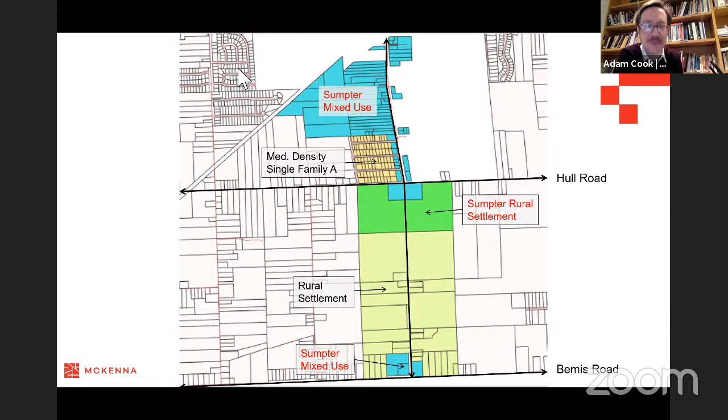So Dan, I think we can probably move on to the regulating plan.

So when we talk about a regulating plan, when we have a number of parcels taken together, we call them a future land use category, Sumpter mixed use. When we get down into the nitty gritty of figuring out what that looks like, we get into the concept of form-based zoning. When you do form-based zoning or form-based coding for an area, a regulating plan works similar to how a zoning map might work, only it's looking at a much more granular, parcel-by-parcel level.

If we go forward one slide, we can look at that proposed regulating plan, and we can see there are several different colors shown. We're zooming in here - we didn't want to show all the way down to those two corners at Bemis, but those corners will also look very similar to this. When we zoom in here, where there's a lot of complexity and existing development along the corridor, we can see these parcels get classified into four distinct categories in this regulating plan.

We start with what are called anchor lots. Those anchor lots are the two areas on the immediate southeast and southwest corners of the Hull Road, Sumpter Road intersection. One small portion of the southwest corner is currently occupied by the Citgo gas station and convenience store. This would apply to that parcel, the area immediately around it, and a mirroring of that area on the other corner.

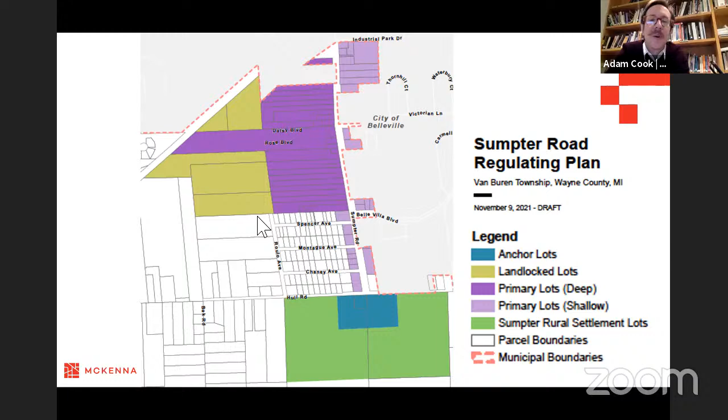It makes sense to mainly go through the building types, and then we'll go back and key them into the various areas illustrated on the regulating plan. It's actually a relatively simple menu of building types, and we'll go through all of them now. There really aren't that many. There are just some slight variations as to which building types are permitted versus accessory versus special uses in the various areas of the regulating plan.

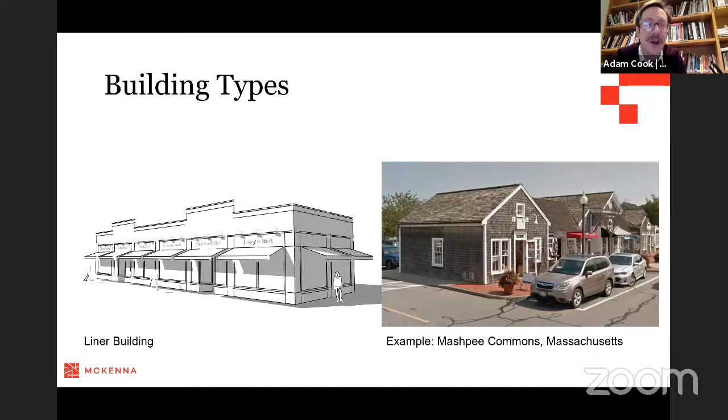Let's go on to the next one. The next one is your mixed use building, and the mixed use building is really one of the basic form-based code 101 buildings.

You see them in a lot of different contexts. You see them in downtown Main Street contexts—if we think about downtown Belleville and some of the new buildings going up and some of the older buildings that exist there, we see a lot of these. But they can also be built in a more rural or semi-rural context, or a village or hamlet context.

Just one example—again another East Coast example—the architectural ornamentation and detailing might look a little different from how it would look in Michigan or the Midwest. But Waterford, Virginia is a rural kind of hamlet-style village on the far outskirts, near Leesburg, if you're familiar with the Washington area—so on the far outskirts of Washington.

It's a village that grew to a point where it could support these mixed use buildings. Even though this is more of a traditional colonial style, it sets a precedent to say this has happened for hundreds of years—we've had these types of buildings, and they are appropriate for the rural or semi-rural environment if done properly. That means paying attention to the overall dimensions, the massing, not going over two stories, and making sure the vernacular architecture is used.

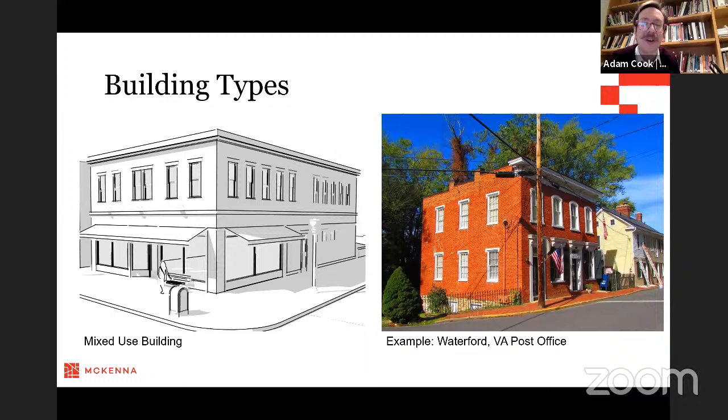Let's go on to the next one, Dan. The next one is the retail building. The retail building is even more basic than the mixed use, because within the confines of that building we're only looking at one use, and that one use is retail.

Again, these buildings you're probably quite familiar with. We see them all over Michigan, in all sorts of contexts. The one I'm showing you on this slide is from Ferndale, and this isn't in downtown Ferndale—it's tucked way back in the middle of a residential neighborhood. These were built frequently, prior to the mid-20th century, as corner stores and neighborhood services, built back in the middle of walkable neighborhoods. These are also appropriate for a semi-rural context, and would look not dissimilar from a nice simple brick building like this one.

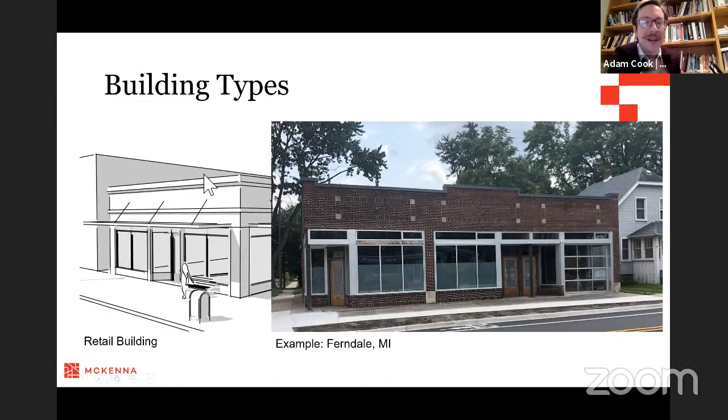Let's go on to the next one. I don't have a built example for this, because it's really an open-ended building type. We call this artisan, studio, craft, and culinary. This is a light industrial building, but when I say light, I mean very light industrial—the type of building that could be an artisan studio or a collection of artisan studios. Think small-scale printmakers, artists, potters, art studios, small metalsmithing studios, small workshops—something where a commercial component is tied to a production component, but that production doesn't create the externalities you'd normally get with a traditional light versus medium versus heavy industrial zoning. We're talking very, very light industrial.

The word culinary is in there—these could be purposed as small-scale production kitchens or community kitchens for people baking commercially but who don't have their own storefront or bakery. So this is very much almost a cottage style of building. You could do small-scale production out of these. I think the key thing to take away from a diagram like this is the scale. We always put a person in these diagrams so we can get a sense of how big a building is relative to the average person. You can see this is very small—that's not a 10 or 12 foot tall individual, it's about somebody of average height. So you're really looking at a one-story building of no more than 10 to 12 feet high, small dimensions, a variety of potential configurations. It's a very flexible building type, really an unassuming, traditional, simple architecture.

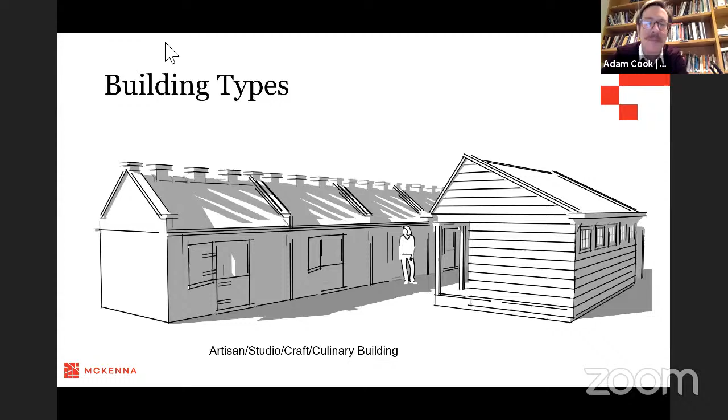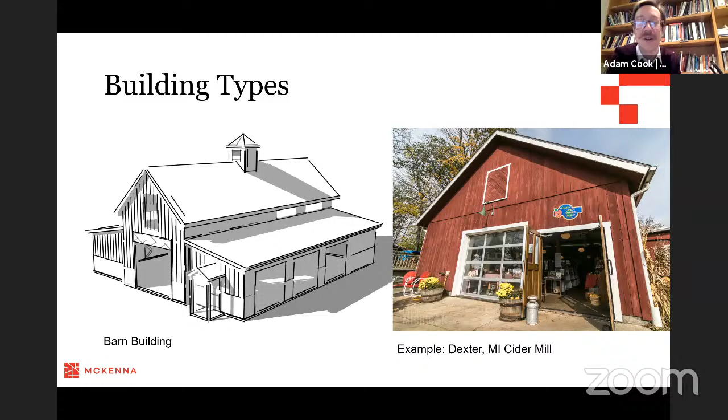When we think of the barn type of building, this is what we're aiming at—something that could actually be used as a commercial venture. There could be a low-externality, small-scale craft or production component taking place, like a cider mill or anything on that level, but there could also be a storefront built into it. It doesn't have to be a smelly or rundown livestock environment. A barn allows for that rustic, rural feel to carry forward, while also providing flexibility for a creative concept like this, or it could simply be used as an accessory building—a traditional storage building with flexibility to grow as properties change hands over the years or as people's lifestyle needs change. Let's move on.

The next one we call a kiln house. Our designer, Mike Campbell, who works on a lot of these things, coined that term for this, and I like it. I Googled the term 'kiln house' and didn't find many references to it, and I think it actually fits the bill quite well.

This is something that you might think of if you were doing pottery. This is the type of small house style building that you might use to have a kiln and fire the pottery. But we're not necessarily assuming that would be the only potential use, because that's a very specialized use.

If we want to take this into a real world example, you can see there on the right, I'm showing some artists' cottages. This is in a little development down in central Georgia called the Cottages at Serenbe, or Serenby, I'm not sure how it's pronounced, but Palmetto, Georgia, and you can Google this and see other pictures.

Dan recently visited Sedona, Arizona, or maybe not so recently, but I know Dan was talking about the artist cottages down there. I thought about showing those, but when we're talking about Southwest, we're in a totally different architectural environment. But from the standpoint of the light building footprint and the types of uses that these are appropriate for...

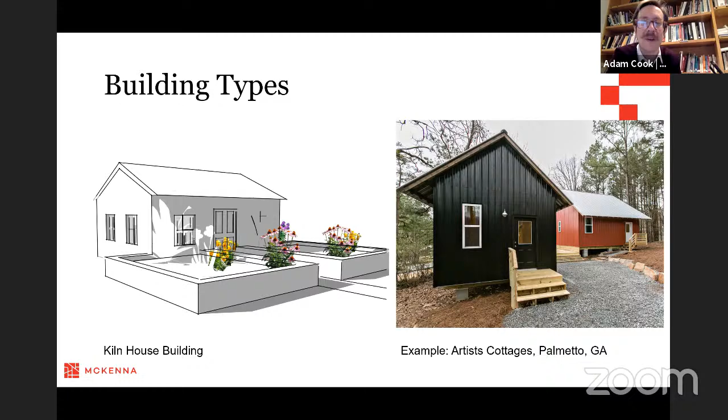This is kind of the vision behind the Kiln House building. Again, you can see in this Georgia example, this is very much a cultivated kind of semi-rural environment where these cottages are nestled deep in the trees. You have gravel pathways, even though they're accessible and have modern fittings on them. You really marry the urban commercial aspects with a very rural rustic environment there.

Next building type, makerspace building. I think I've shown this Ann Arbor T-shirt example in a few presentations to the Van Buren Township, as well as some other communities I work with, because I like it so much.

It's really a good example of what a building type would look like that had a retail shopfront component, something open to the public on a regular basis, but also had an adjacent space that could be used for small scale storage and production. From time to time, some of those spaces require direct vehicular access to the building. So this is one idea of how that might look.

So we can see with the Ann Arbor T-shirt company, they do have their T-shirts there on prominent display in their windows in that retail shopfront component. You can go in there during business hours and shop and look around and buy T-shirts. And then immediately adjacent, they have that storage component to the building, which in this case has a garage door access, but they've cleaned it up very nicely.

It doesn't look like your traditional industrial building because they've done a nice stucco treatment on their exterior wall. They've done a mural, and they've done some really nice signage.

This is the type of building that used to really populate areas on the kind of urban rural fringe before we started hyper kind of zoning things into industrial parks and putting those buildings far back in little pods. Back when buildings lined the roads, you would see buildings that had a combination of shop front and garage doors and vehicular access.

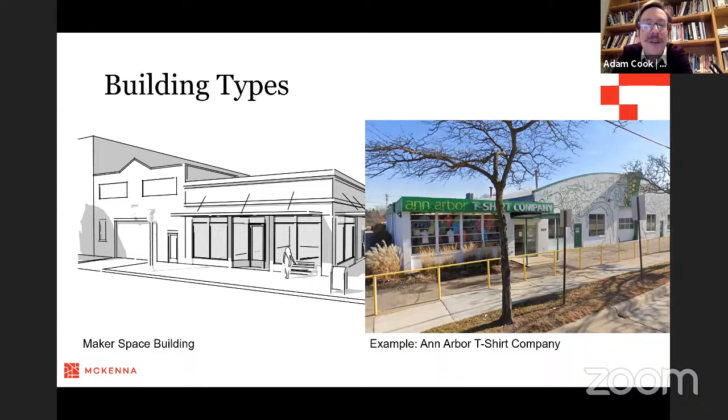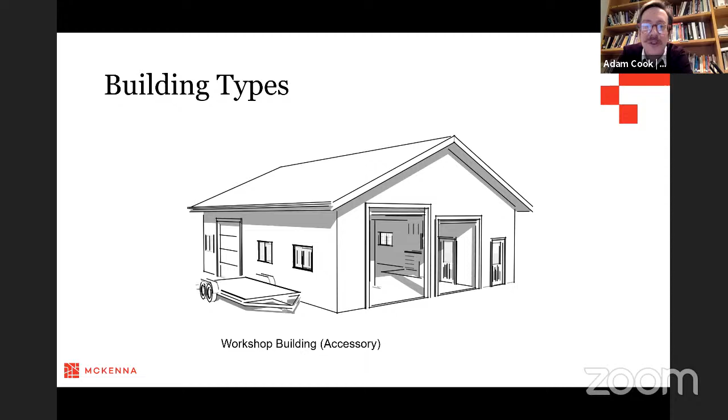Let's go on to the next one. The next couple, I don't think we have photos because they're really self-explanatory. Accessory workshop building—it's basically a little bit larger garage. Again, we're going to talk about how those can be sequenced into these various areas on the regulating plan.

Let's look at the next two. I believe these are the last two, the accessory dwelling unit, which we can talk about in a little more detail. You're likely familiar with the concept of the accessory dwelling unit. Obviously it would be tied to a principal residential unit or a single family house.

In some cases, it would incorporate a detached unit, what you would see there on the right, where you have the simple detached garage. In some cases, you can take that garage and then stack a small residential unit above it, or behind it, or beside it, and you can call that an ADU. In some cases, the ADU is just a small cottage that doesn't have a garage component. There are multiple ways to do it, but the key is that it's tied to a principal residential use, and it's very small scale.

So in terms of the floor plate, you might limit it to 800 square feet or 850 square feet, which is a studio or a one bedroom type of flat.

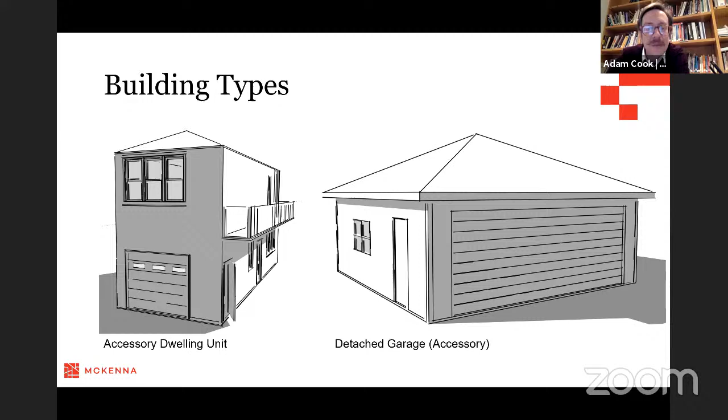And I think at this point, Dan, we're going to then go into the various lot types. Is that something you wanted to pull up your interactive map for before we go through these, or after?

Okay, sounds good. I know we've thrown a little bit at you, and we'll try to go through this and explain it as clearly as possible. When we talk about anchor lots, as you recall, these are the lots immediately on the southeast and southwest corners of Sumpter and Hall, and again on the northeast and northwest corners of Sumpter and Bemis. The vision for those lots really is to have a kind of rural commercial environment that serves surrounding residents, via a mix of things. We don't want to plan for a kind of prepackaged concept the way you would if you were to simply do this as general commercial and allow big box or strip malls to come in. What you've seen in this intro, flipping through all of the building types, really is to show that with a limited palette of appropriately designed building types, you can accommodate a flexible range of uses that would appeal to creative entrepreneurs as well as some more traditional retail concepts, without having to go all the way to repeating the same sort of suburban pattern in an area where that probably wouldn't be as welcome.

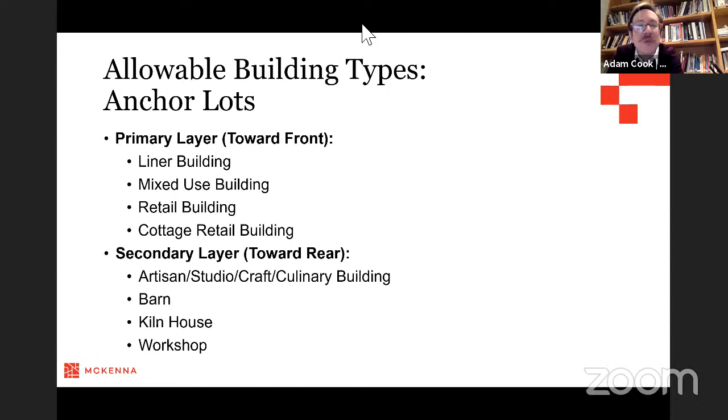One potential concept could be imagining a really nice cottage retail building fronting one of those corners, with that barn type building behind it, maybe connected by some informal parking or a gravel lot. Maybe that's a cider mill, or a country market, with a traditional storefront in the cottage retail building, and then additional commercial space or production space for cider and wine in an artisan studio type layout behind it, or even in a barn similar to what we saw in Dexter. It's groupings of these smaller scale buildings that can house a mixture of commercial and productive uses - that's the vision for those anchor lots.

Thank you, Adam. I think with the remainder of these it'll be best served by just going over them right on the map. So we'll toggle back to the slides, but let's go right to the map to show these anchor lots in context, just to give people a sense of what we're describing here.

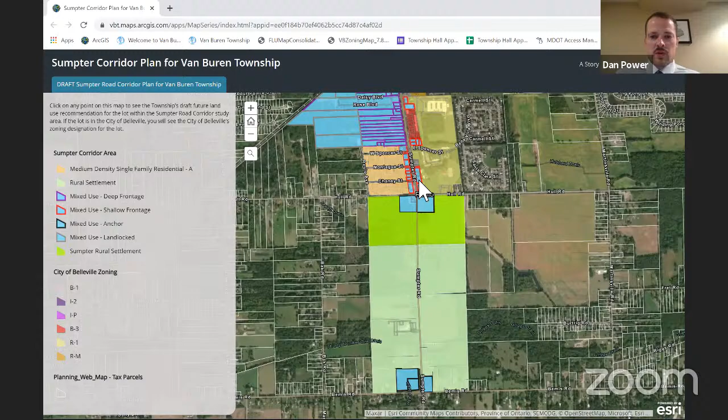If everybody can see this map, it's available now to all the planning commission to click on and dig into a little bit. When we talk about these anchor lots, you can see the black outline on the mixed use parcels here. What we're describing is lots that are going to define the gateway into the district up here at Hull Road, and then the gateway into the township down there at Bemis Road.

The only example of anything built on any of these lots right now is the Citgo gas station. Otherwise, these are primarily agricultural or undeveloped, but they could serve as this kind of anchor to define the district and define the township. If you click on this map, and this is just a quick tutorial, you go to more information, you can find the definition and the list that Adam just went through.

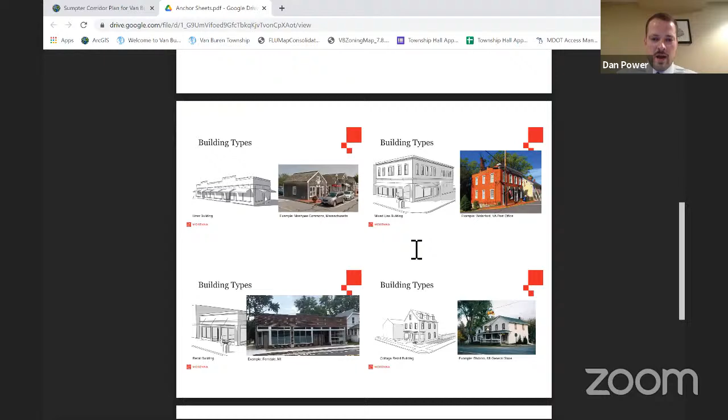And then you can see here where, just like Adam said, on these anchor lots we really want to emphasize the architectural character of the building in the front and have a robust use that may have a commercial component and bring some formality to these corners. That's where those building types come in. But situated behind those, you might have buildings with an accessory or auxiliary function that serve some of the production or industry that helps foster the business in the front of the lot. So that would be the idea here.

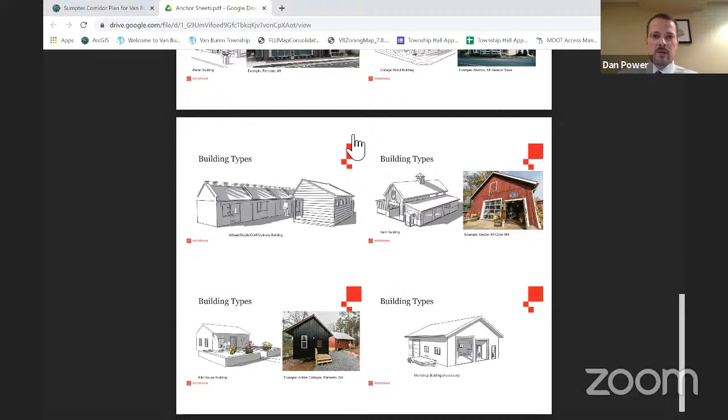So with that really quick overview, let's go back into talking about the next type of lot on the next slide, which is the shallow frontage lot. Adam, why don't you describe that? Actually, I'll just pull it right up on the map again.

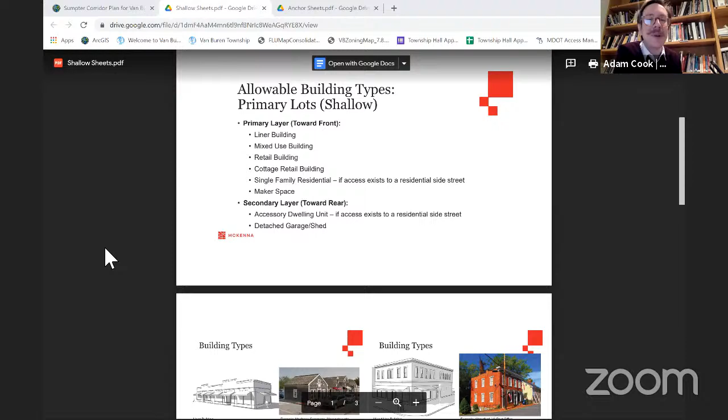Then we get into the more commercial building types, getting back into what we saw for the anchor lots. It could be a liner building, particularly where there's an underdeveloped or underperforming retail property with front-loaded parking—that might be an appropriate place for a liner building. Of course, as we've seen before, the mixed-use building, the retail building, or the cottage retail building could all be appropriate for those locations.

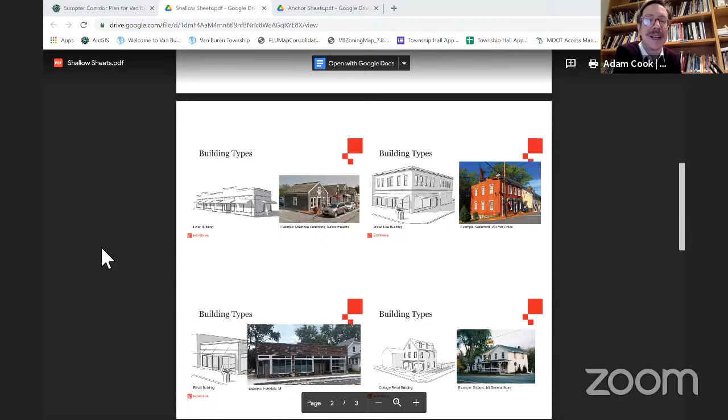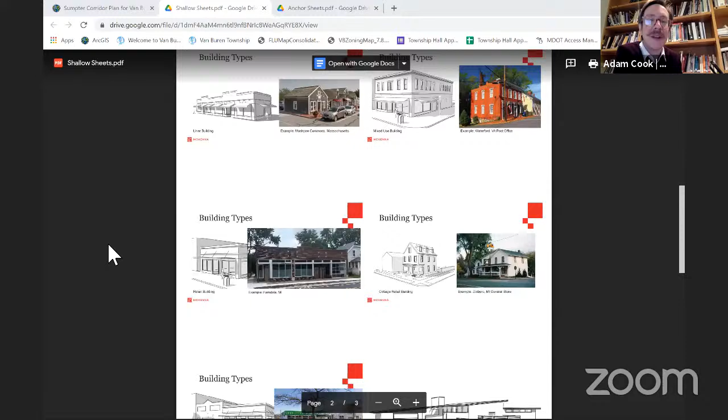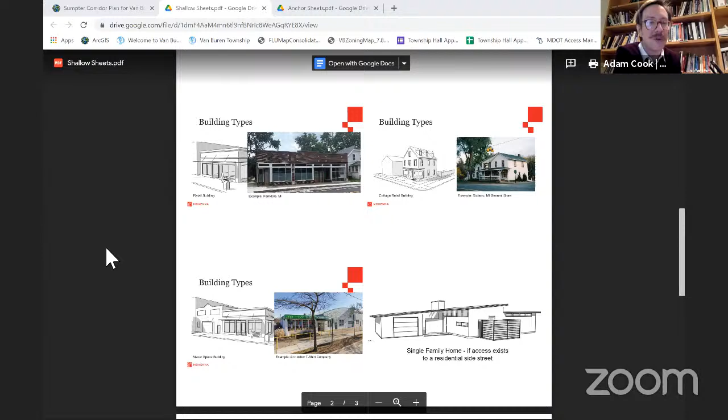We add one other building type into the shallow primary lot type, maybe more appropriate for areas bordering the railroad and the city of Belleville: the makerspace building type, a very light industrial type that has some vehicular access to the building but still has a retail storefront, with design limitations to ensure it doesn't become as intensely used as the buildings you see if you drive back inside the Davenport Industrial Park. We're not talking about anything nearly as intense as that for these makerspace buildings.

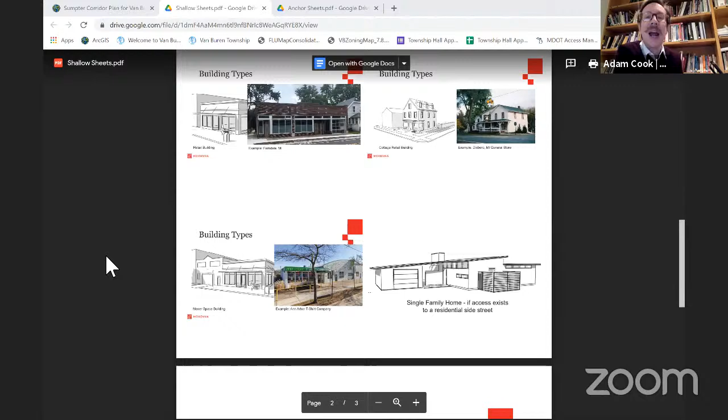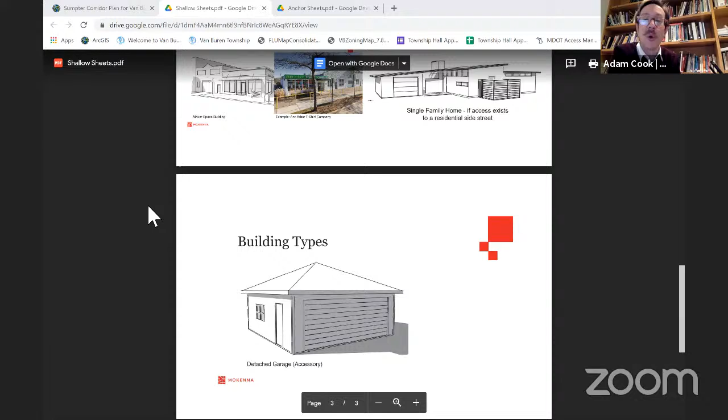So those are the primary layer front buildings. For the rear buildings it's very basic—an accessory dwelling unit, assuming there's a principal residential unit there, meaning a single family house, an ADU would be allowed toward the rear. Alternatively, a traditional detached garage or shed type, depending on what the primary building type was. The typology is fairly simple, but it allows those parcels to flex between more of a residential and more of a very light industrial use that directly interfaces with the corridor itself.

Now's a good opportunity to take a breath and think about what we just heard. We've talked about two of the lot types now, both of which have a role in defining some of the frontage in this district, and you see some of the more formal building types here.

Right before letting the Planning Commission and the audience ask questions, I'll mention one overarching concept of zoning and planning: this is the plan we want to see materialize, potentially that the Planning Commission wants to see materialize, as property owners choose to redevelop. In most cases we're pushing this process to happen organically, where somebody would actually choose to redevelop this way. There are properties currently zoned a certain way, and as things stand, this plan wouldn't preempt someone from continuing to use or develop their property under current zoning, but it does guide them toward future rezoning decisions. That's something to keep in mind as we look at this map—it's not what we're enforcing today, but hopefully gradually as properties develop and redevelop.

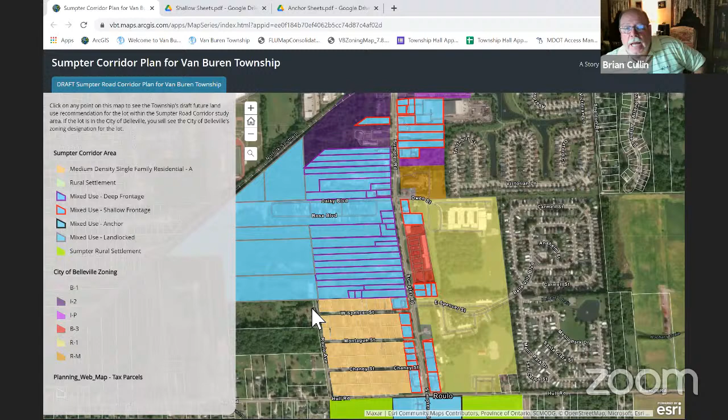My question is, what are the anchor lot sizes approximately? What size are you looking at for those lots to be?

Thanks for the question. So the current master plan has a stretch already planned for the local commercial designation. That planned local commercial strip extends as far as you see on this map, east and west. Now this map does show these lots going farther south, and it kind of squares them off.

Adam and I may have to get back to you, but I believe they're either 600 by 600 or 800 by 800. So that's about the size, and that would provide a focused area in which you build in a way that still connects to, for example, the public sanitary sewer on Hull Road. But I can certainly look that up, maybe get back to you by the end of the meeting with the exact dimensions.

Well, I'm not worried about it. I'm looking because if you're looking at a strip mall, how long is the strip mall going to be roughly to fit into that type of area?

By strip mall, I'm referring to the liner designation. And I would think we'd also want to look to make sure we had room for parking in the rear, because Hull Road or Sumpter Road gets very busy, and it'd be very difficult to have parking along the road itself. I don't know, that's my feeling on it.

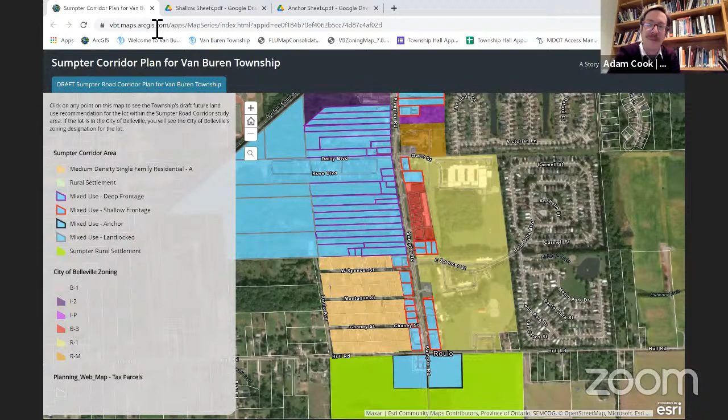And I know that looks relatively small on a map, but from a site planning perspective you actually do a heck of a lot with these building types. If you have a 500-foot linear frontage, and you were to do liner buildings for even part of it, a liner building, from a retail space, you're looking at maybe a 30-foot depth and 20 to 25-foot width of a storefront. So you're really looking at maybe a block of those extending 100 feet at the most before you'd have a gap or an access point in it. And that's just one example.

Thanks, Evan. That was a really good question, Commissioner Cullin. Another way to look at that is if you look here, you might see this red stretch. That's the existing Belleville Plaza shopping center.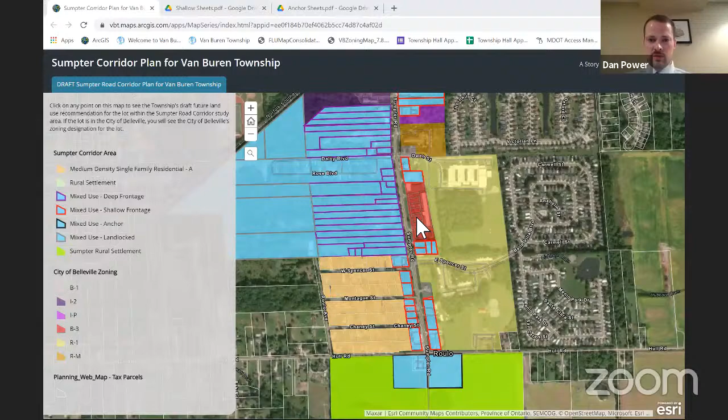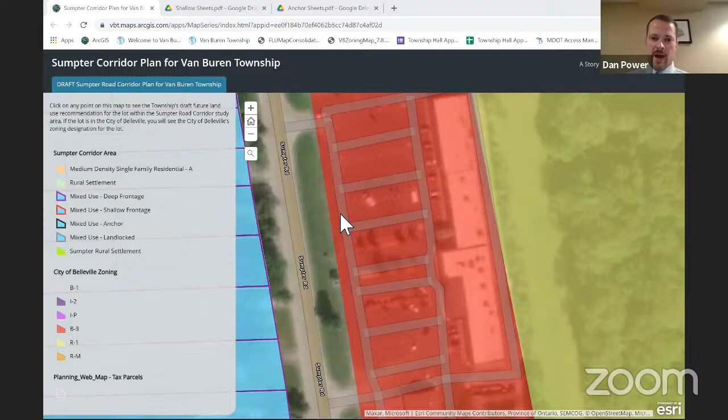You're talking about a couple of... if you zoom in, you can see the kind of parking configuration they have there. You do have two-way access and aisles of conventional parking throughout that site. So these are significantly sized parcels.

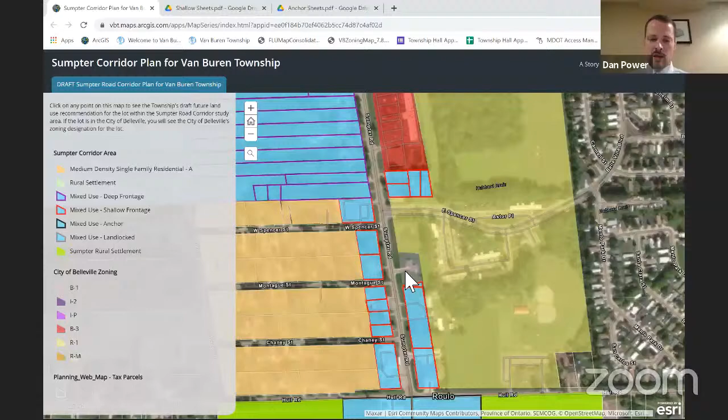Now, when you get into the shallow frontage lots, that's where you're going to have more of a form that is likely to push up toward the right of way and have parking behind. In some cases on the east side of the road, you may see in our recommendations something called a slip street, where you'd have a kind of parallel path for cars to enter a site and then park in front of a building along a shared access drive. So those are narrower sites, but they can still accommodate a fair amount of parking.

A good question, it's something to look out for. Why don't I, so we can feel maybe less that the map is imposing on us, have everybody up on the screen here. Any other questions about the anchor or shallow frontage lots?

Director Power, are we looking at continuing with what we did with cross access easements and things? So, to go with what Commissioner Cullen was mentioning, where we'd have the lots behind when adding in the parking, you could have it with slip streets, but also have it in the back like a boulevard or something else that connects some of the lots, kind of like that other parcel you just brought up.

So are we envisioning some kind of design to help with cars just blindly pulling out onto the road? Yep, and that's where zoning comes in.

Zoning is the tool that enables us to actually activate these things. The zoning ordinance, as it currently stands, does have recommendations for minimum distance between commercial driveways, for example. It refers to cross access, and that's something we on the zoning and site plan review side always look for as well. So you'll see comments in this report echoing those principles of cross access, access easements, shared access drives, and consolidating driveways so you don't have too many spaced together on the main road. Good question.

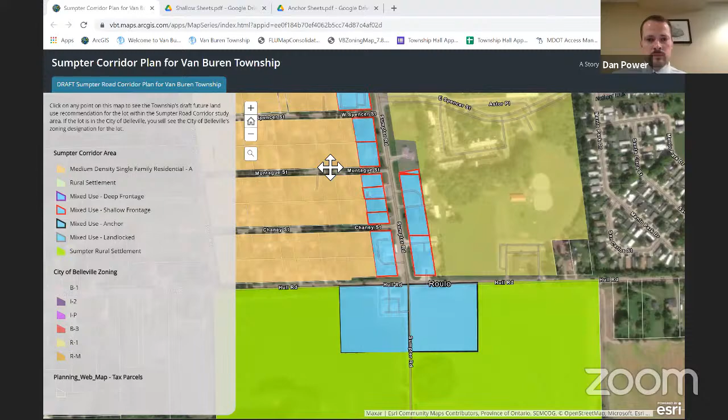As I pull this up and kick it back over to Adam, I'll mention that the mind's eye will think of all the homes north of the Roulo subdivision on the west side of Sumpter Road as meeting this category. With a few exceptions, these are largely currently used residentially, but it's worth pointing out that a lot of this area is actually currently zoned industrially. It's a relic of the proximity to industrial use in the city of Belleville and the adjacency to the railroad.

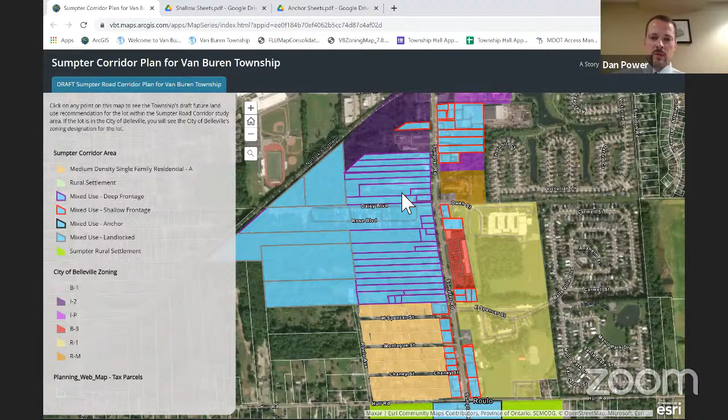A lot of the parcels up here are currently zoned industrially. They've been built as home sites. I think powers that be saw the potential for future industrial use here, but now we're revisiting this and seeing where we want to give the ability for continued use of residential in these areas, but also some creative ways to enable people to maybe make and produce things at a small scale on these lots.

So Adam, I will pull up one of these lots as an example and put up the image of the deep frontage lot type. You can go over the building types.

When we're talking about deep frontage, to echo that point, you've got a number of parcels that are inefficiently platted in the sense that they're very long, very narrow, with no access to the rear. This is where we've had probably the most discussion on how these might look in a future context where access is granted to the rear, and what possibilities that might open up for a property owner to potentially develop more of that property front to back, or to even split that property and allow a purchaser of the back portion of one of those long lots—assuming they have access via a new road—to develop it, because the rear now becomes the front, so to speak.

So what we're talking about is, when you think about layers, we're talking about the primary layer—now we're getting a bit more specific. The primary layer is really the first 300 feet of depth on one of these long parcels, and the secondary layer is everything beyond that 300 feet of depth.

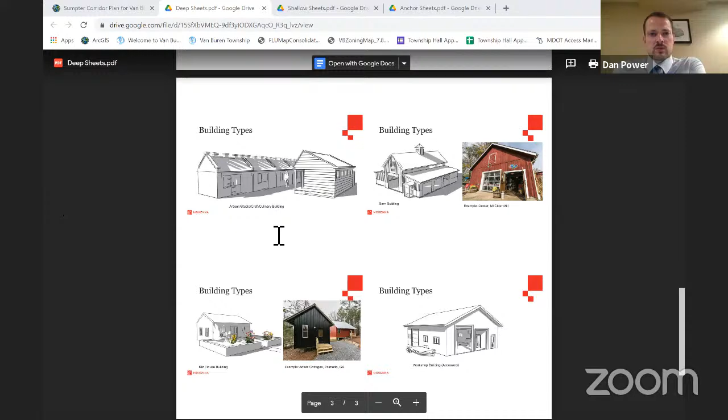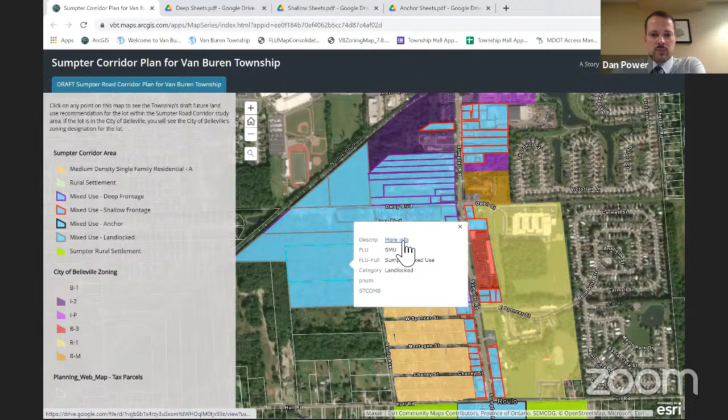Let me go back to the map and point out, you're going to see some lots back here that exist currently without frontage, and that's where we have the idea to talk about the landlocked type for this district. So I'll bring open that sheet, and Adam, if you want to go into that.

Certainly, and again the landlocked, this is almost an adjunct of the deep lots, because now we're looking very much at the rear. We're looking at parcels that have no road access, in some cases railroad adjacency but not direct access. And they're much larger parcels.

And so if there were a way in the future to access them, this would I think open up more of the full palette of building types, less of the purely commercial building types, but really more of the adaptable mixed use types that we've shown in this family. So single family residential, and then beyond that you have the cottage retail, the artisan studio, craft culinary, the barn, the kiln house, the workshop.

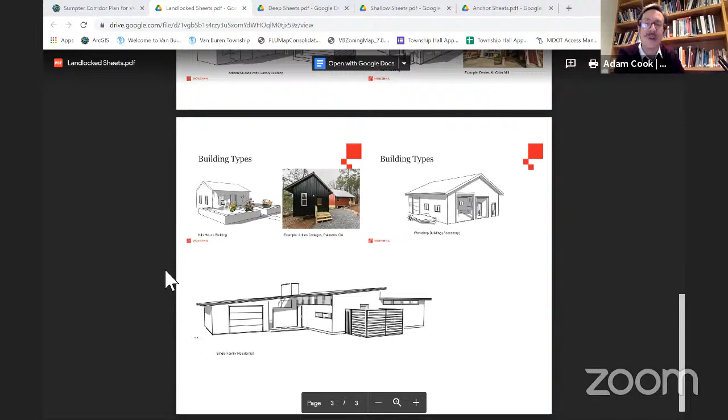Plus the kind of standard accessory buildings, meaning the ADU. So a single family house gets developed back there that can potentially come part and parcel with an ADU if that property owner so chose. And then of course your accessory shed and your detached garage. These are the types of very basic structures that serve really as outbuildings to almost anything, not just a residential structure.

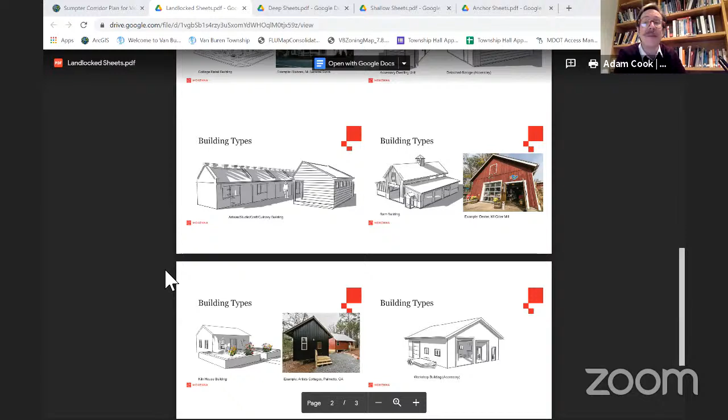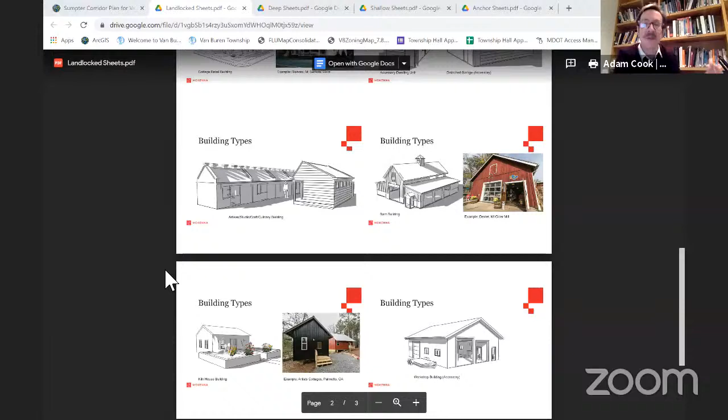And again, that's not deviating really at all from the idea from the rear of those deep lots. You're looking at, over time, if the development pattern does start to form from the front, meaning front Sumpter, west toward the rear of those lots, and then further west onto those larger parcels that currently don't have access. You're really going from a Sumpter frontage that is still going to be predominantly single family residential with some commercial options that architecturally are very compatible with the single family residential, into an environment that has a lot more of these flexible building types mixed in with single family homes, if people chose to go that route.

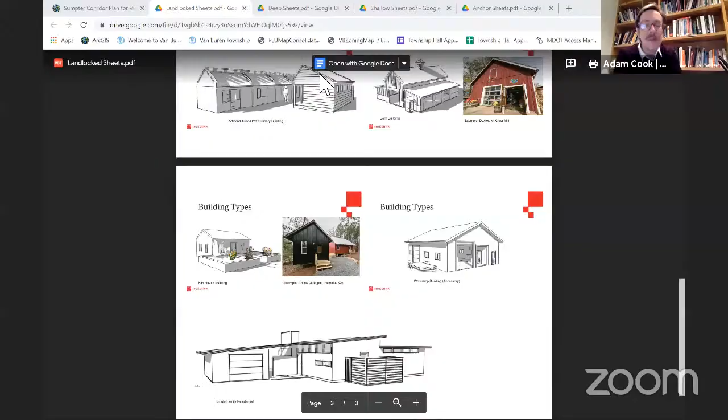And I think that sums it up for really the four types. Inside baseball, with Dan and our subcommittee, we experimented with a number of other sort of lot types on these draft regulating plans, and we're actually able to consolidate it into four lot types, which I like. I think that's very simple, because we found that we had, I think, 6 or 7 at one time, and we found a number of them to be redundant. So this has really become a light and easy to use and understand scheme for what is kind of a more complex problem than what we thought 6 or 8 months ago when we started looking at this corridor.

Just one detail to build onto the landlocked type. You may be thinking, well, these are landlocked parcels, are they really buildable? The premise here is that we'll eventually potentially see the extension of a street like Roulo or Bach Road that would daylight these parcels, and we'd want to anticipate what that would look like.

The difference between a deep frontage lot and a landlocked lot is that you're not defining the frontage of the main corridor of Sumpter Road on these landlocked parcels like you are on the frontage lots. So you're going to see a more localized, residential or maker-oriented building type established back there, as opposed to a commercial building type, if that road gets built.

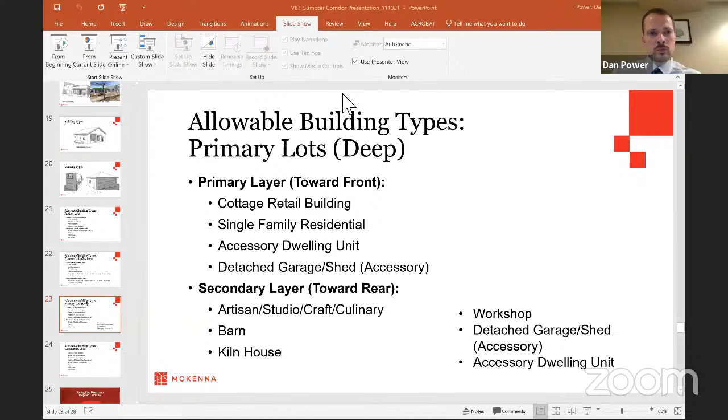I think this slide is fairly open-ended because we talked about building form, and in that library, that palette of building types, in a lot of cases, the way you regulate those building types puts constraints on the uses that can fundamentally take place. So if you say, okay, we can allow for a small makerspace type building that has a small workspace adjacent to a retail space with a garage door no more than 15 feet high, you're not going to get a major logistics center or distribution center coming into a building like that - that's just one extreme example.

If Conway or someone wanted to build a building to the standards in the district and come in there, you couldn't tell them no, but good luck having that business model take place out of a building like that. Now, it's not to say there aren't appropriate areas for those types of things in the township - there absolutely are, and they're already on our zoning and future land use map. But that's one example of how a building type can implicitly govern the range of uses that take place within the building.

That's not to say that there's no space for use designations in a form-based code, or in this case, a form-based district that's part of a zoning ordinance that's fundamentally use-based in the township.

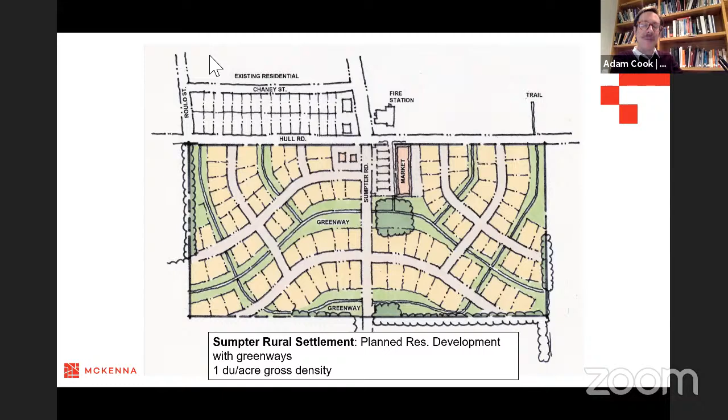If you go to the next one, you can see the hamlet idea, which is personally my favorite, because it really mirrors the kind of pattern you see in the Cheney subdivision, just mirrored over on the south side of Hull. It's even possible for a residential settlement of a certain size to be served by a community septic system, if it's done correctly and clustered appropriately.

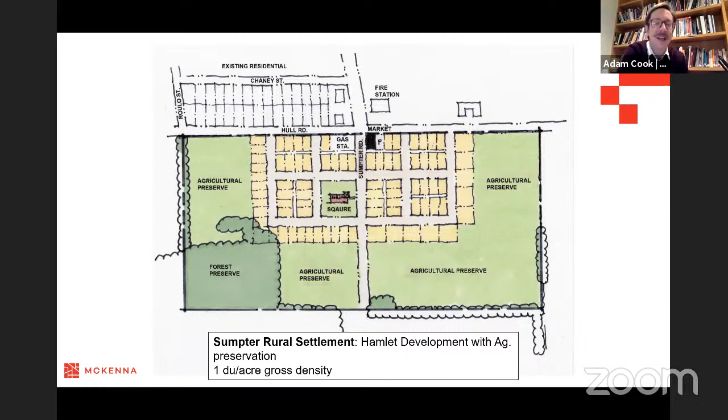So there are ways to do it without allowing for the standard kind of large lot cul-de-sac served rural residential subdivision to predominate on these lots. I think that's in keeping with the principal concern we heard over and over from people that live in the areas, that they want to see a balance of development with open space preservation. So I think a hamlet concept like this for the rural settlement area preserves smaller lot sizes, smaller building footprints, and maybe a connected street network. When I'm thinking street network, I'm thinking streets modeled after Cheney Street, a realistically sized street footprint. Combine that with development of those two anchor lots in the way that we spoke about earlier.

So I think we're at our last slide, and this is an opportunity for any lingering thoughts from the planning commission or from the audience about where we're going with this plan.

I guess I'll add one thing about those last two slides. There's a way we have to implement that kind of thing. We have a current zoning district called agricultural and estates, which is what almost everything south of Hull Road, except along Rawsonville Road, is currently zoned. That allows for a mix of predominantly residential uses, some institutional uses like churches, religious buildings. But that district standard would still apply in all likelihood on those parcels. What we're trying to do is enforce a design standard so that, as Adam said, they're not just conventionally developed in a sprawling manner.

So what you'd see is probably something in the zoning ordinance that links those parcels specifically to some of these unique design characteristics presented tonight. It could be the option of the developer to choose one, but we want to make sure there's a linkage to those residential areas surrounding the corners in this district to have comprehensive design features. That's something we can accomplish through zoning.